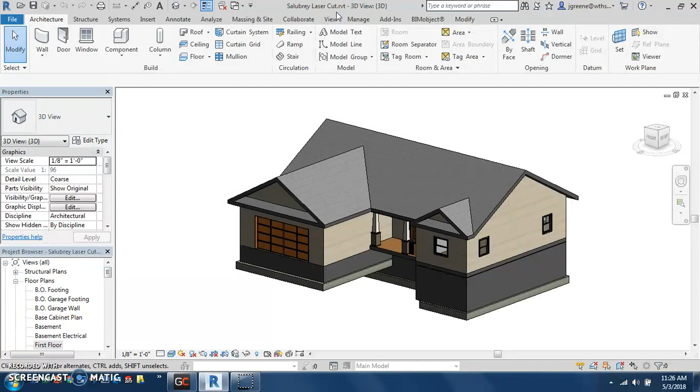Now I can start to do some tricks to get this to work. First, I'm going to go to the first floor and get rid of almost all of my interior walls, or as much as possible, because that's less data to mess with in Autodesk Inventor. I'm also going to get rid of other things like components, since this is only going to be an external model and we don't need to worry about the internals. So I'll select one of my interior walls, select all the interior ones, and delete them.

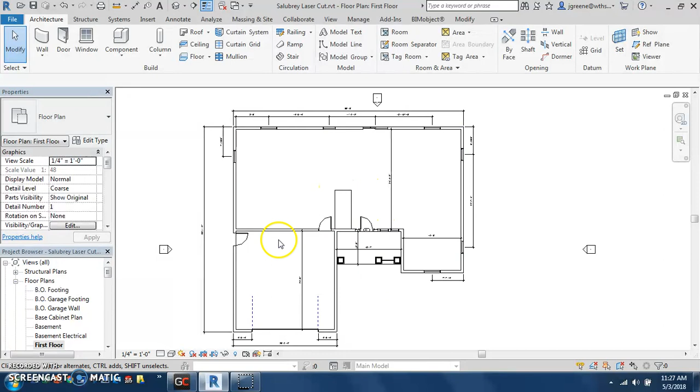Next, I'm just going to start getting rid of and deleting a lot of other things I don't need in this case. So let's see here - this is going to go away, that's going to go away, and I'll get rid of that. Everything else is pretty good, I like that, so that's not an issue.

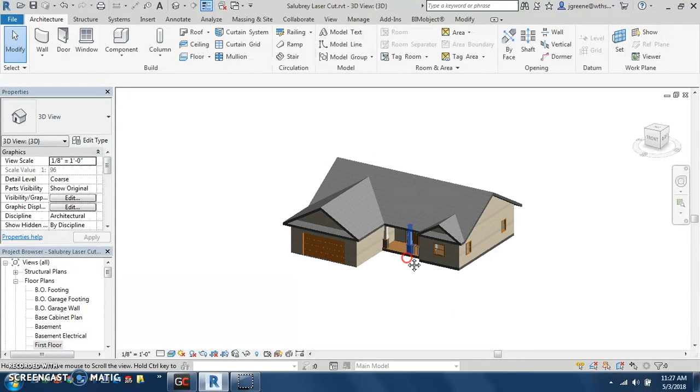I'm also going to go to the 3D view and get rid of my entire basement, as I won't be needing that for my model either. So in about 2 minutes, I was able to get rid of all my interior stuff and components, and I'm just left with my roof and walls. I'm going to go ahead and save that, making sure I'm not saving over my original file, just my laser cut version.

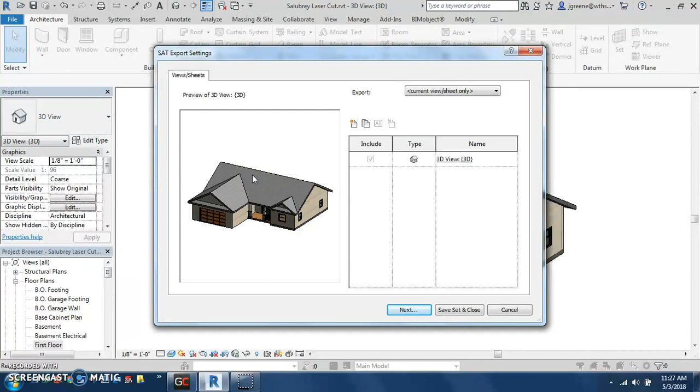I'm going to go up to File, Export, CAD Formats, and export this as an SAT file. I want to make sure I'm in the 3D model view, because then it will export the 3D - if you're not, just go back to your 3D view. I'll select Next, and it's going to ask me to save this, so you save this in your Google Drive - I'm going to put it on my desktop right now. You just give it a second to gather all this data and export it. It might take a little bit, so once that's done, let's double check here - I should have a file. There it is, looks good.

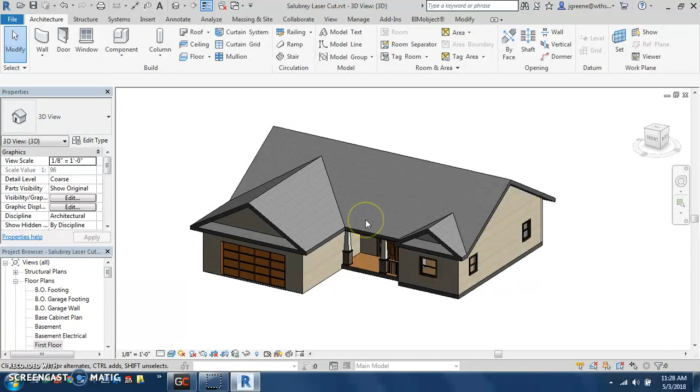So now I don't need Revit anymore. What I'm going to do is open up Autodesk Inventor. Since it might take a little bit to load, I'm going to pause the video and start it once Inventor is loaded.

Now that I have Autodesk Inventor open, I close out of Revit. I'm going to go ahead and go to File, Open, and change the file type down to an SAT file. I'll navigate to my SAT file and select Open - again, this is going to be quite a bit of data. It asks what do you want to create this as - I'm going to leave this as an assembly and hit OK.

Again, this might take a few minutes to open up - it's a large file, it's going to generate a lot. So once it opens up, I will restart the video. Eventually, after things load up, you'll get this import dialog box - you want to just go ahead and hit OK. Again, this is prepping the model, and then we're starting to import the model into Inventor.

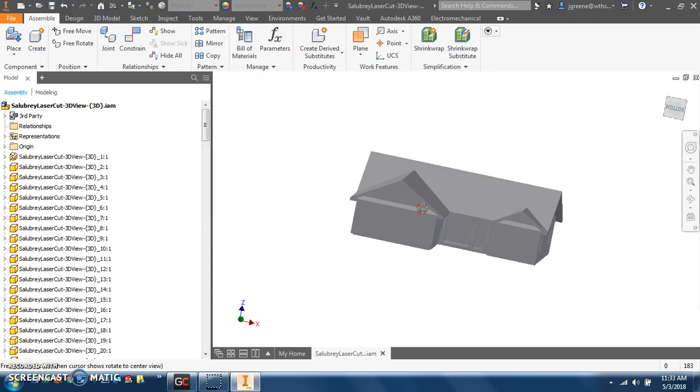Alright, so now the model imports. It's not exactly perfect, but it is a pretty solid representation of it. It's all in this generic color gray, which is fine.

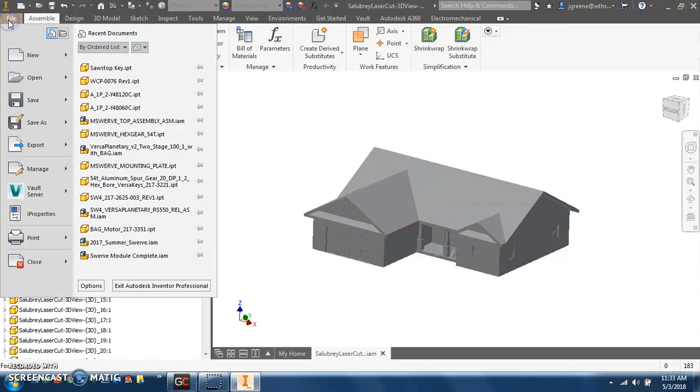So what we're going to do now is take this item and essentially go around the house to get all of our walls on a drawing sheet. To do this, we're going to go up to File, New, and select a new drawing. We're going to put all of our parts on this drawing, and we're going to end up exporting it, but we want to put every single one of our pieces on this so we can use this properly.

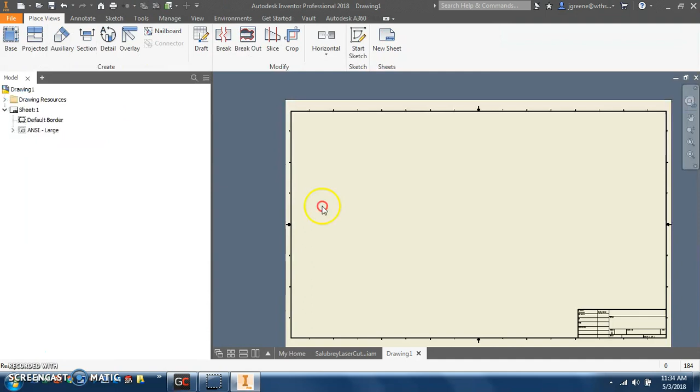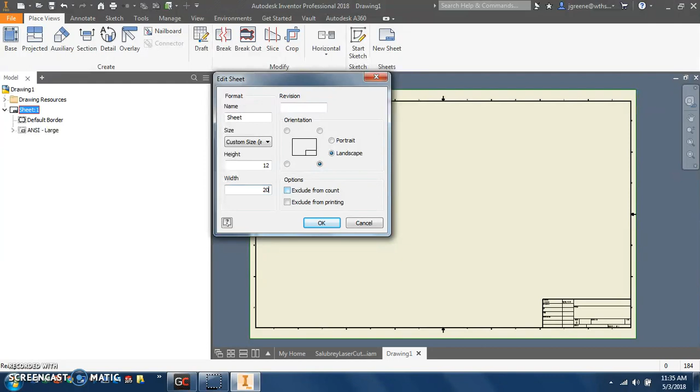Alright, now that our sheet is open, we're going to go up to sheet 1. We're going to right click on it, select edit sheet, and for our size here, we're actually going to go to custom size. We're going to change the height to 12 and the width to 20. That's roughly the size the laser cutter inside 105 can cut, so we'll go 20 by 12 and select OK. That will change the size of the paper.

We're going to go over where it says default border and ANSI large. If these don't show up for you, click the little arrow next to it to get them to show up. Right click and delete both of these. That's going to give us a blank page in which we can start bringing in different pieces.

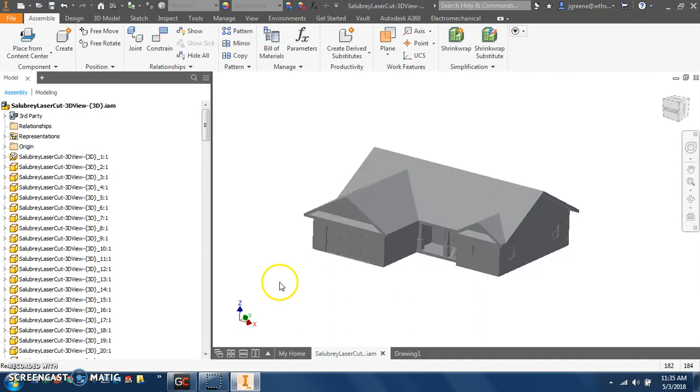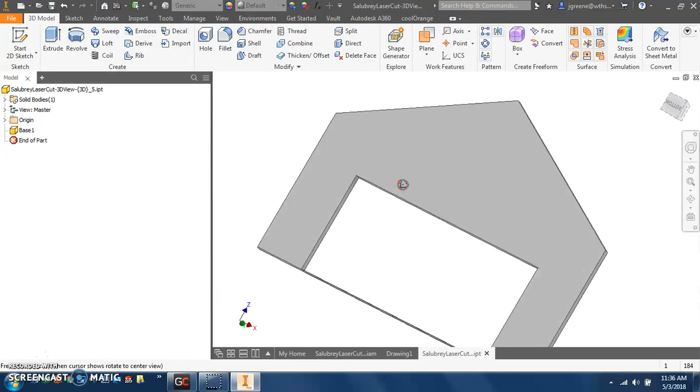Now I'm going to go to the assembly file that we imported, and I'm going to start in one spot and just move around the house. Right here, this is the front of the garage. I'm going to right click on this part and open the part. It's going to open into a separate tab and make it the active piece. So when I go back to my drawing, I'm going to select base, and since it's an active piece being open, this is the piece we use. I'm going to use the view cube and manipulate this the way I want, making sure the scale down here is 1/48.

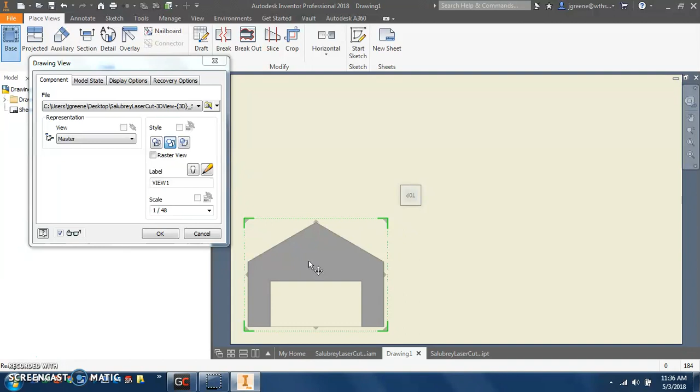The current house in there is the full model, and we don't want that. Instead, we want a 1/4 inch scale. To complete a 1/4 inch scale, we need to use a scale of 1/48 to help us, because it sees it in inches, so we divide it by 48 and that's what we're looking for. Once I change that scale, make sure it's 48, I'll hit OK. It says you must save the part assembly document before placing the view, so you can go ahead and hit OK. And it brings in that piece for us.

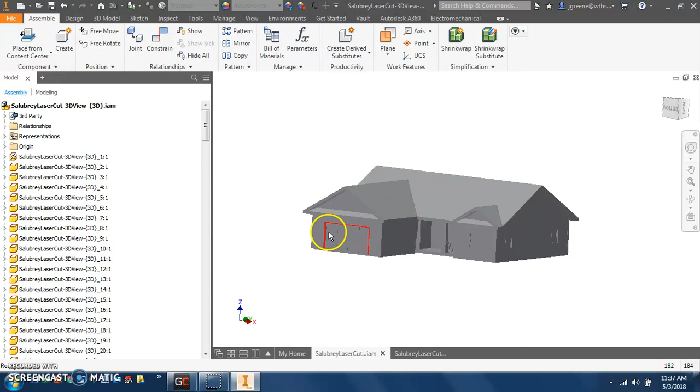So we're done with the garage. I'm going to close out of it and go back here. To make sure I know what I'm doing, I'm going to click and delete that face. Now that I'm done with that, I get rid of it on the model, nothing to worry about.

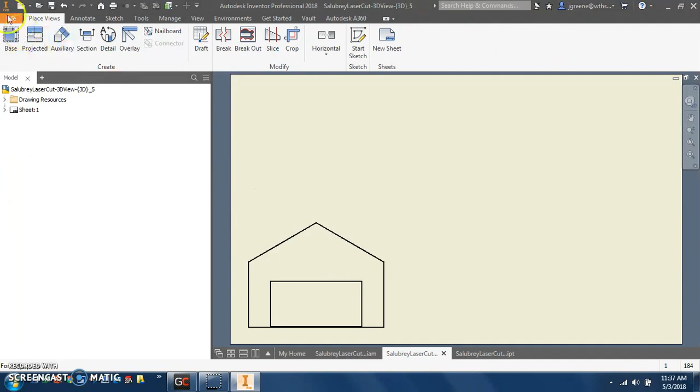Next, I'm just going to kind of move clockwise. I'm going to select this next garage wall, open it, go back here to base view, manipulate the view cube so I can see it best, and move things close to each other to utilize as much space as I can. Make sure it's 1/48, always check since it might change. The last thing you want is to have parts that are misrepresented. So I'm going to hit OK, yep, go ahead and save it.

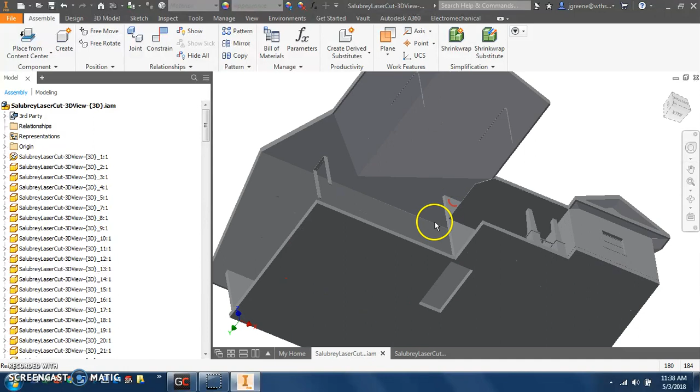This opens up. I will now close the part. I'll go over here and delete that part. So now what's going to happen is I'm just going to continue to move around the house until I get everything that I need.

I'm going to go ahead and show one more, and then I'm just going to kind of move around on my own. I'll pause the video because you don't need to see me do every single one.

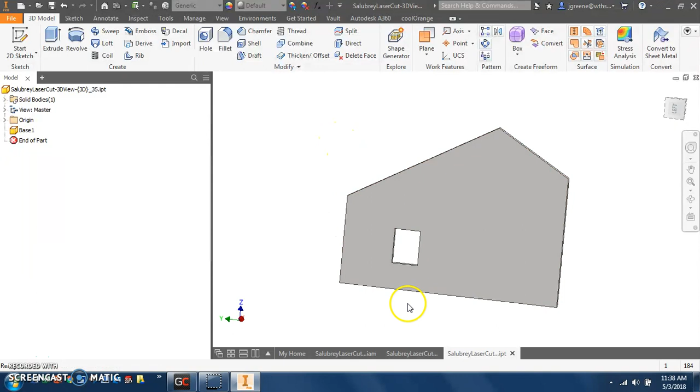So I'm going to do one more. Here's this piece, open it up, base view, select, I will rotate this. You see when I rotated it, it actually brought it down to a 1/100 scale, so I'm going to change that to 1/48, 1 divided by 48. Bring it down here and select OK, OK to save. So again, just bring in the faces.

What I'll do now is I'm going to pause the video. I'm going to complete the majority of this sheet until I have to move on, and I'll show you how you can create another sheet if you have to.

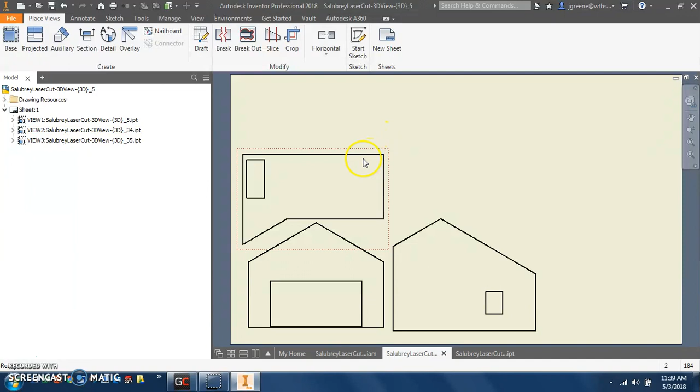Alright, so I got here, ladies and gentlemen. I'm starting to only have about 3 spots left, and I want to utilize as much of the sheet as I possibly can, so I'm wasting the least amount of material. Right here, I've got a gap here, here, and here, so I'm going to try to find a piece and manipulate it best I can.

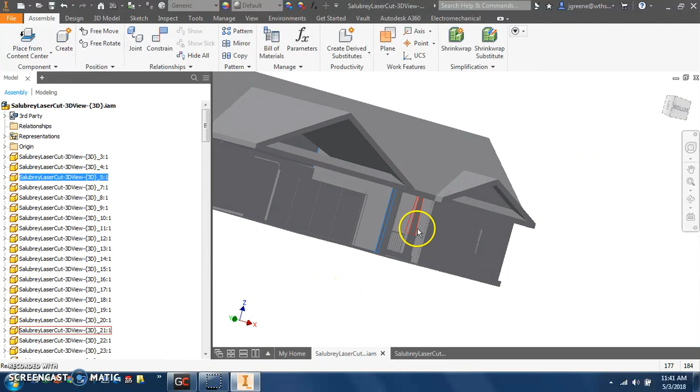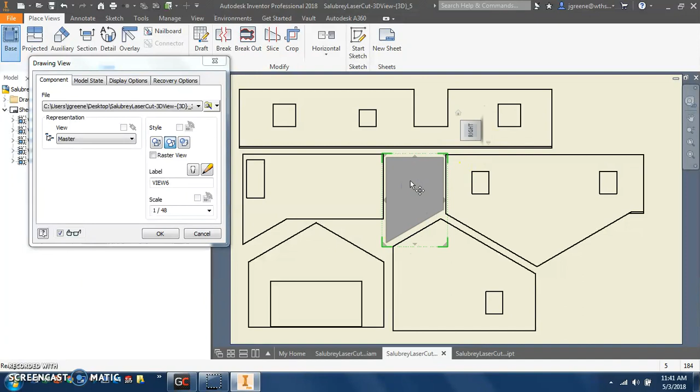So I've got this piece in here, this wall, and it seems to be pretty small, so I'm going to open this up. Here's the piece, okay, I'll go to my base view, I will rotate this. Can I get it into here? Might be able to rotate it. Ooh, look at that, so I can fit it right in there. Again, that can save some room for me later on as I try to manipulate it.

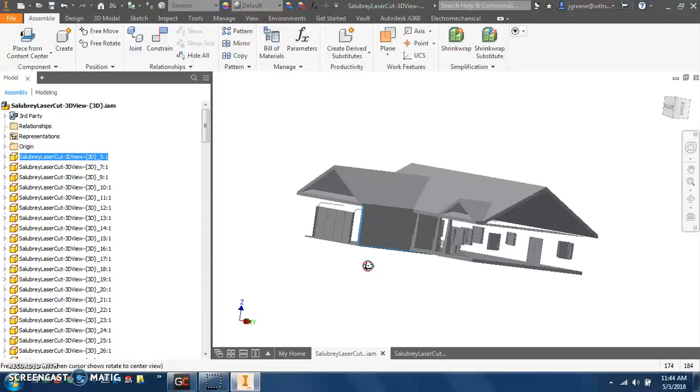So you might want to think about how to arrange your material as best as possible so you waste the least amount of board that you have. I'll pause the video and keep continuing. So I'm at the point now where I have one garage left for all my outside walls, but I don't have any room to put it on this board.

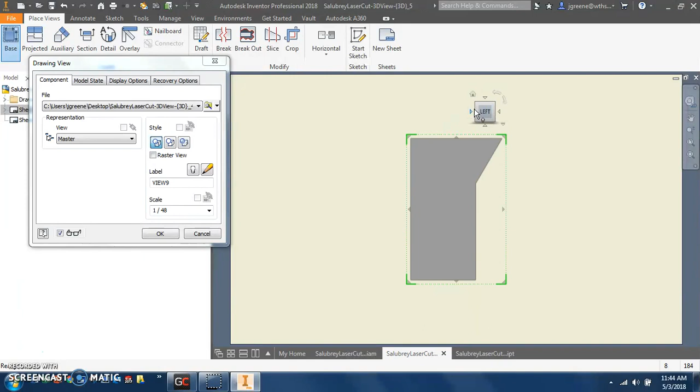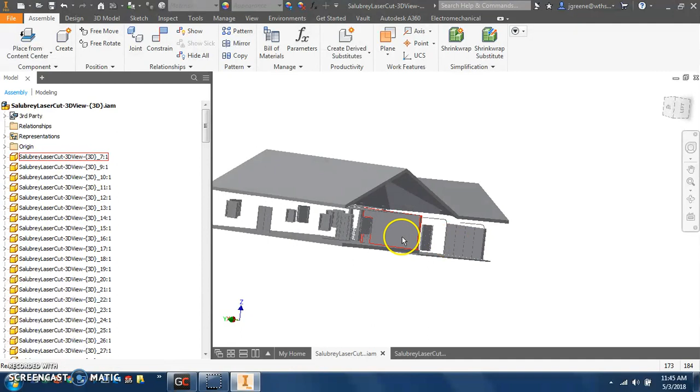So next what I'm going to do is I still need room, so I'm going to go up to New Sheet and select New Sheet, and just like that it makes a copy of the first sheet without any of the stuff on there. So then I can open up this wall, my garage wall. I'll bring it in, make sure it's a 1/48 scale, and bring it into a spot here. Now I have all of my exterior walls. Don't worry about all the doors and windows in there. I do have one interior wall for the back of my garage, but I'm not going to put that in because I don't need it. So at this point, I'm in good shape.

Next what I'm going to do is the roof, and the roof is going to take the most time and it's the most complicated. I'm going to open up my roof by itself, and I can't export just the faces on this very quickly and get it all to work. So what I'm going to do is create these as separate parts and then put it all together. Here we go.

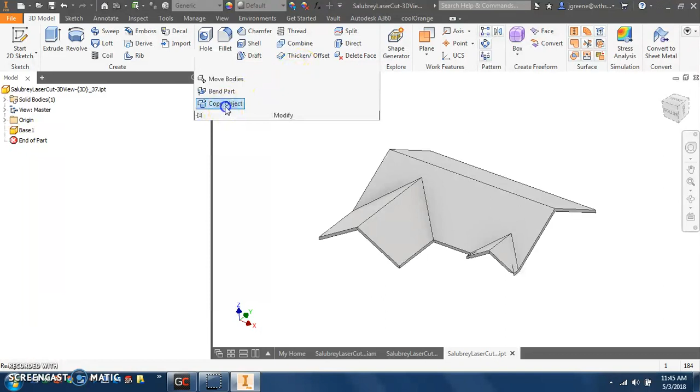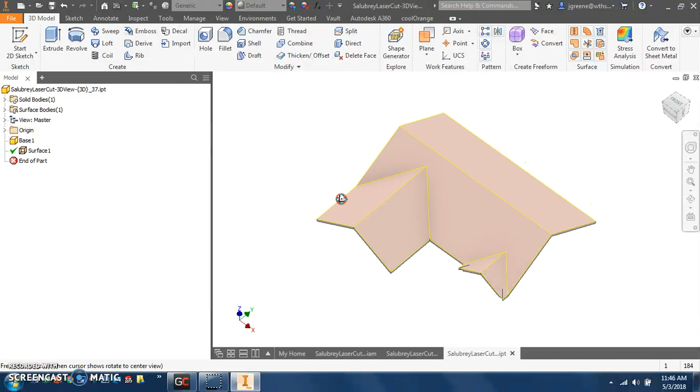I am going to create a face of this by creating a copy of the object, and I'm going to select my faces—all the top faces of my roof. That's all I need. Then I'm going to create a surface and select OK. It'll say it could maybe mess something up, but that's fine, doesn't really matter. So now I have this surface. I'm going to go to my base view and actually get rid of it—delete it. So now I just have the faces of my roof.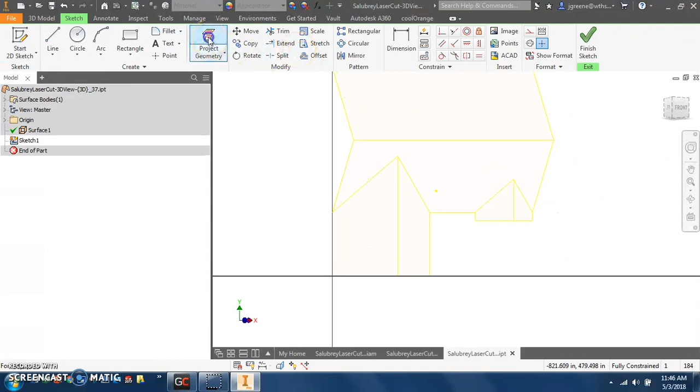Now I'm going to create each one and extrude them. I'm going to take a sketch on this surface, for this part of the roof, and project all of my edges for that roof. I'll hit Finish Sketch, then Extrude, extruding this to 0.118 or 0.125—it doesn't really matter. I'm going to make sure that is a solid extrusion. So I found an interesting little thing.

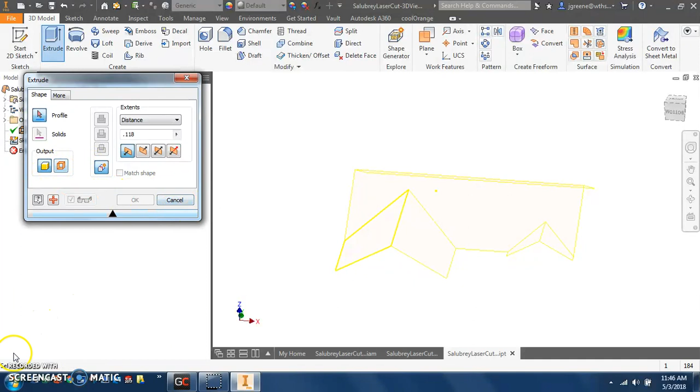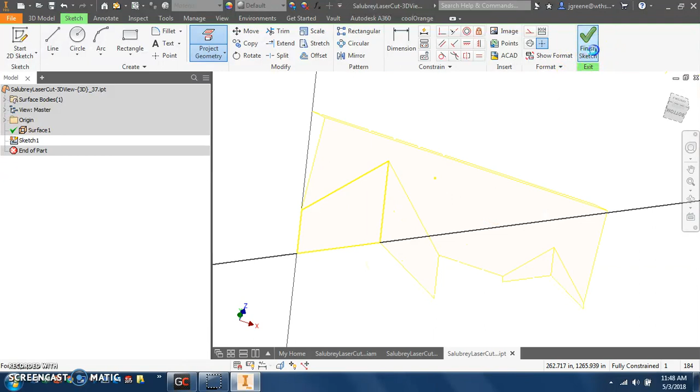When I went to extrude and clicked on solid here, it wouldn't let me—it was saying this was an open loop. If I go back into this sketch and zoom in, sometimes the corners don't match up and there's a little gap missing here. So I can just project that little gap so I do have a closed area. If not, you can draw lines. Now when I go to Finish Sketch and extrude, it will find it. Extrude at 0.118, and I'll go ahead and hit OK. So that's one part. I'm going to do that with all the other parts.

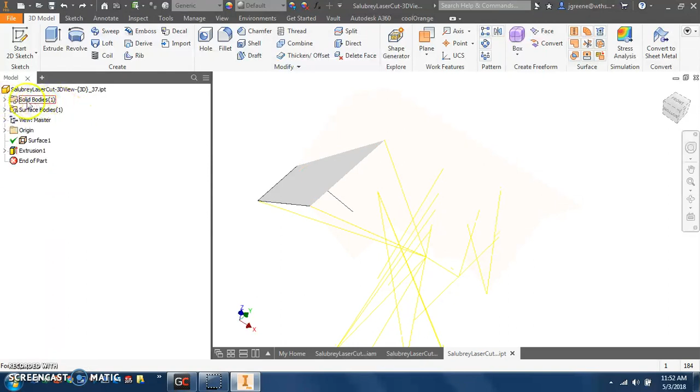Alright, so now I just need to finish the rest of the parts here, and this one also poses a nice little fun issue. Over here in solid bodies, when we first created it, we have one solid on the part. I'm going to right click and change the visibility of that. Now when I sketch on this surface, I have all my original lines, so I can just project these out and finish the sketch. Again, I might have some issues where I need open gaps, but in this case I don't have any, which is nice, so I'm just going to hit OK. It does make it invisible here because it's still part of that solid we made invisible.

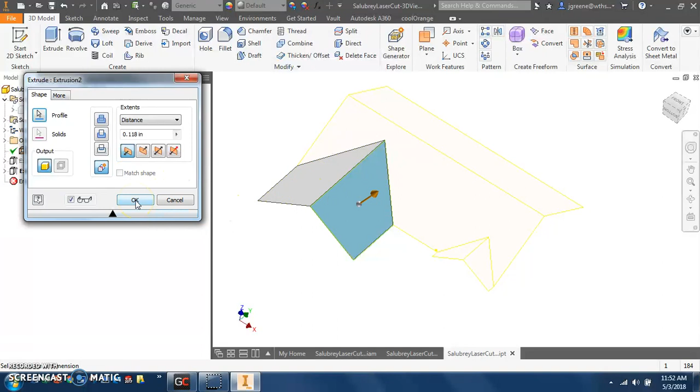So I'm actually going to go back into extrusion, and what you need to do for each one of these is click this button called New Solid. It's default there for the first one, but the next one needs it too. I'll hit OK. When it does that, you can see it creates this as a new solid—up here in the solid bodies, it's there. I'm going to right click and turn off the visibility of that one, and go around and do that for all the other ones.

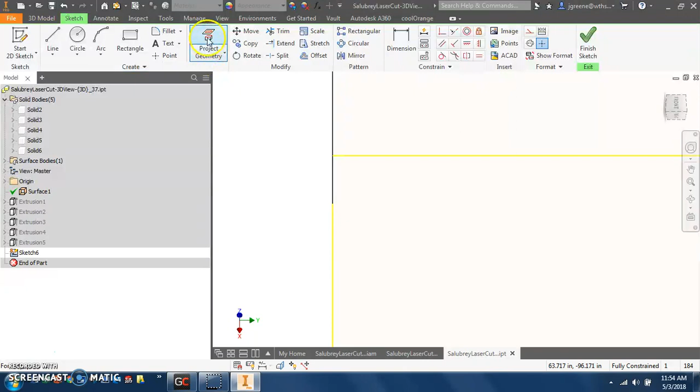So this is my last one right here. With this being my last one, I did find out that there's a little gap here, so I'm just going to project this. I tried to extrude it and it wouldn't work. So again, extrude, make sure I click this New Solid button, hit OK. And now I have all of these bodies. I can click on each one and show the visibility, and so here are all of my parts right there.

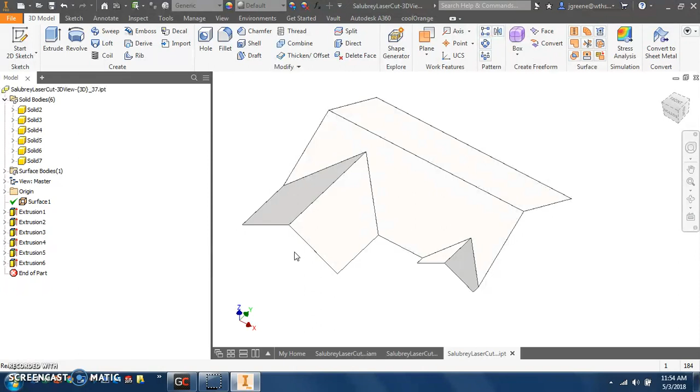And what I can start to do with them is actually export them into the sheet. So I'll show you how to do that in the next video.